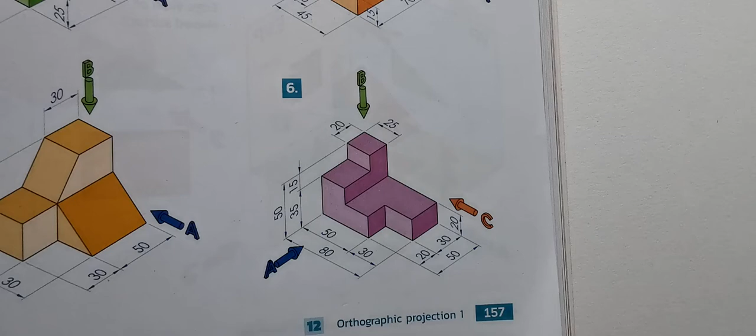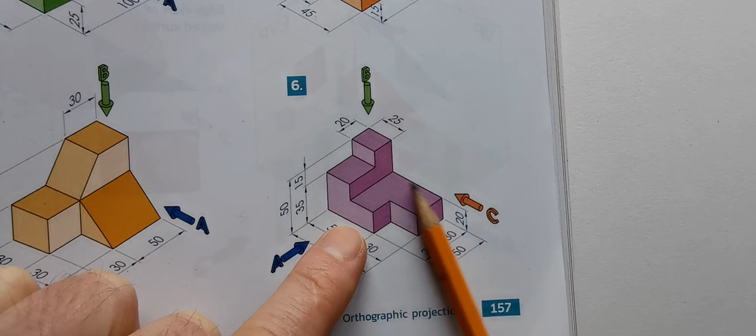Okay, everybody, next exercise here is exercise 6 or question 6. Now again there, in terms of crating, what is the easiest way to do this? I'm going to go with all the block on the ground first, and I'm going to ignore this L-shaped thing sticking up there. I'm going to do a second crate for that afterwards.

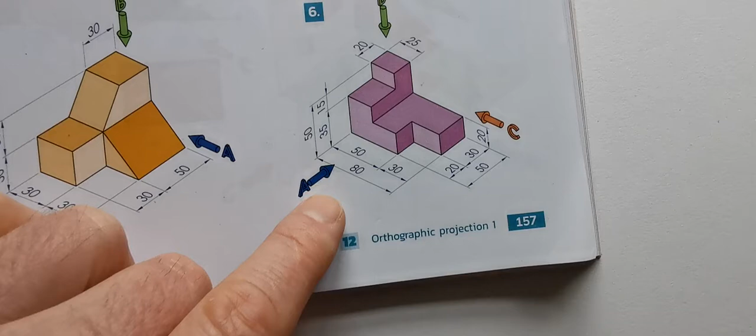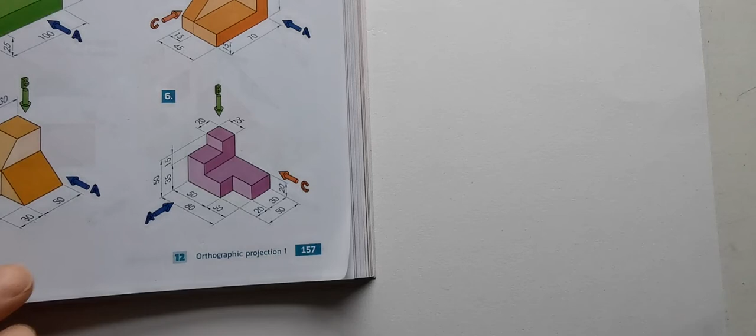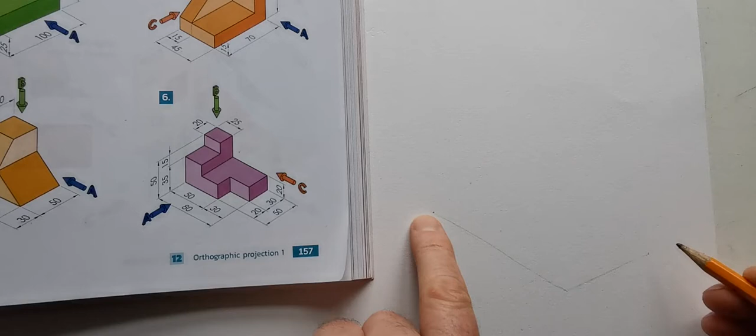So look, roughly the size of this is 80 by 50 roughly. So just zoom back a little bit away from this. Alright, so hopefully we can see that. So it's roughly 80. So by 50. So basically longer on the left, and it goes up about 20.

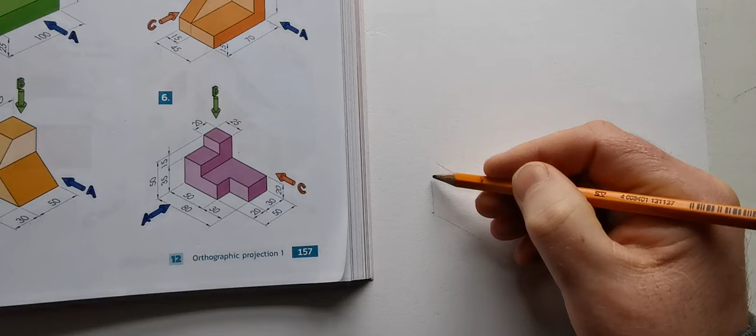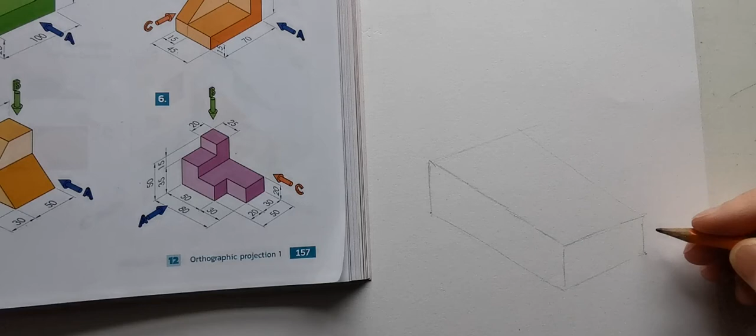So let's try and sketch in this slab kind of on the ground. So again there, you're just trying to get the angle there by scribbling over that lightly, just drawing the air above it. And that's not too bad there now. So that's the bottom slab there. Now in 20 then, which would be just a bit less than half, I'm going to just heavy that in.

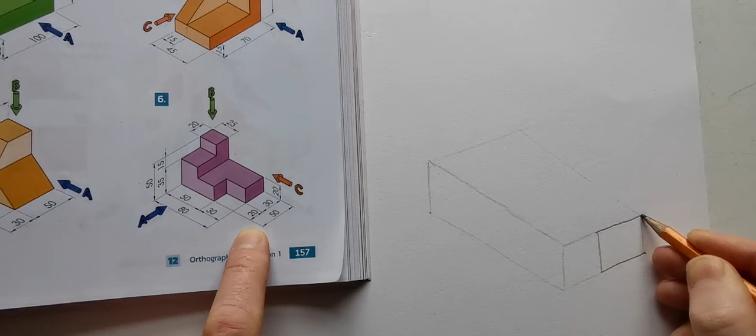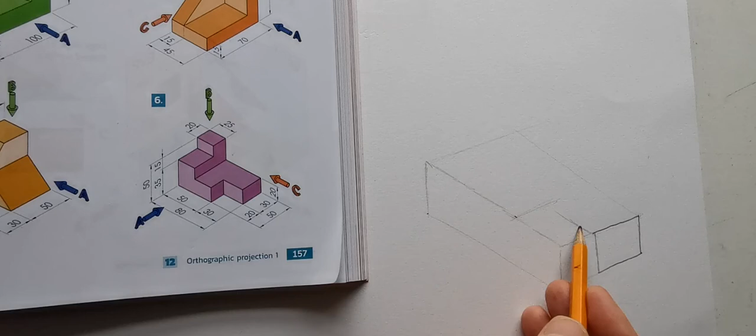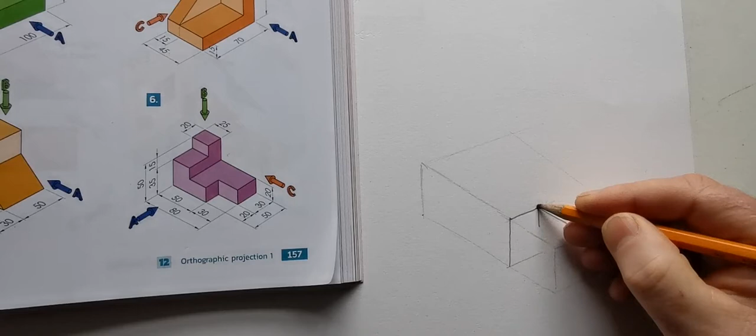And there's a cut going back here 30, which might be about that far. So I'm just going to take that across and bring this back. And that's going to be that notch or cut taken out of that there. Bring that down. And that goes back at this angle. And finally I'm just going to return this then back to here.

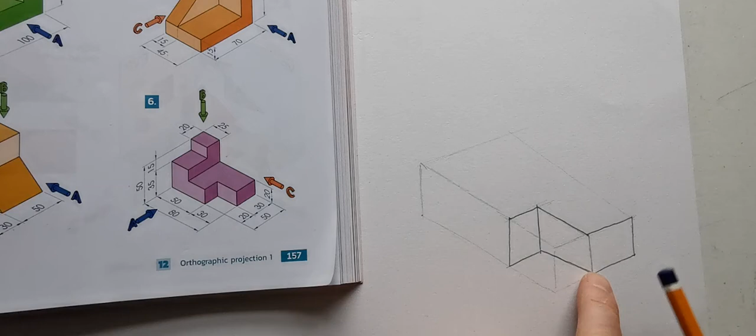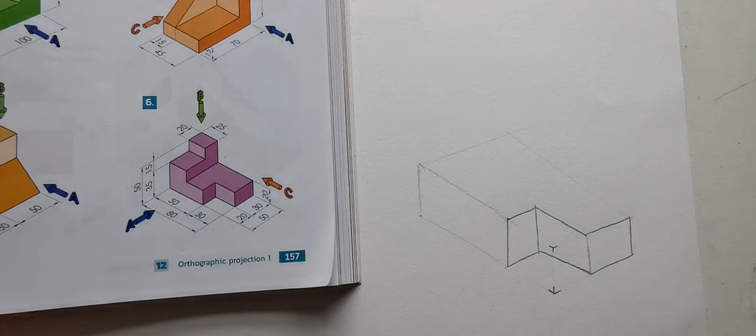And I could remove the crate from here if I wanted, or I could leave it. I think I'll just lighten it off, but I will again just leave the evidence of having had it there. Now back here then in 20, so if that's up 20, about the same distance in, I'm going to take this across and I'm going to bring this up now.

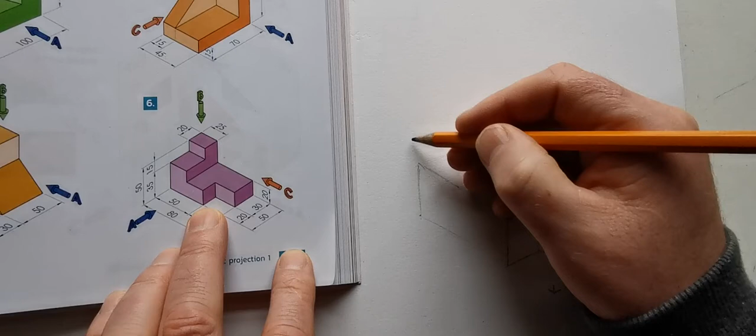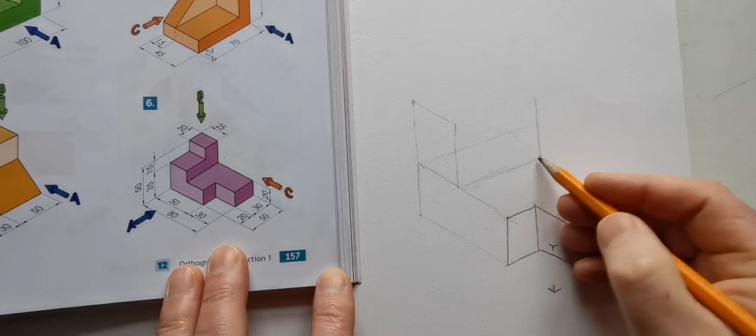So the full height of this is 35 and 15, which is 50. So if that's 20, it needs to come up 20 more, which would be that much, and then another bit, which would be 50. So I'm going to just put that height on here first of all, and then I'm going to bring this up about the same, take that back, across the back, and put on this slope here. So that's my crate for the taller bit back here.

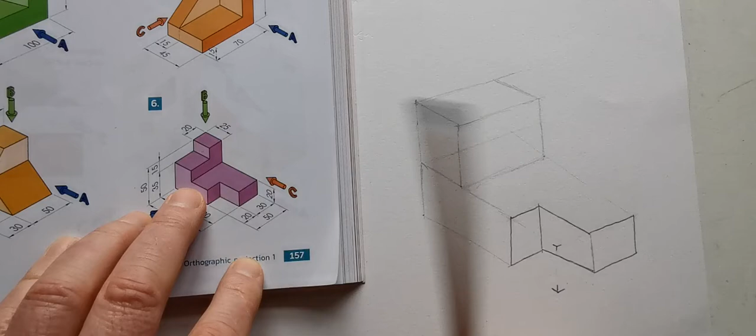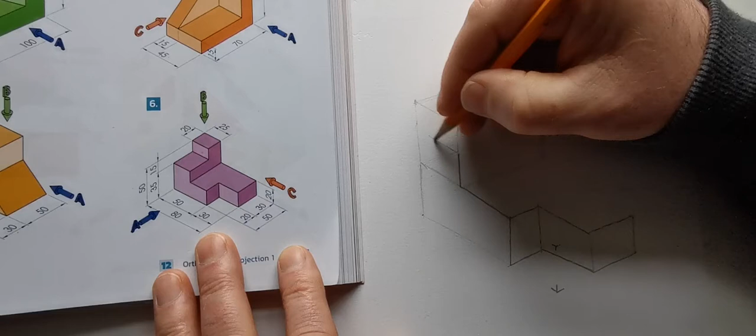So now this comes up. So the whole thing is 50. So basically it's halfway up. So if this is up 20, so it's 15 and 15. So that works out okay. So it's about halfway up here. This comes up. So now that's heavy back to there. That goes back here. I'm going to heavy this in. And that's the side of this sorted.

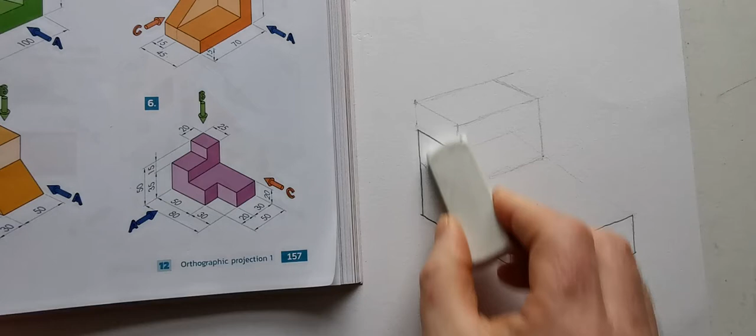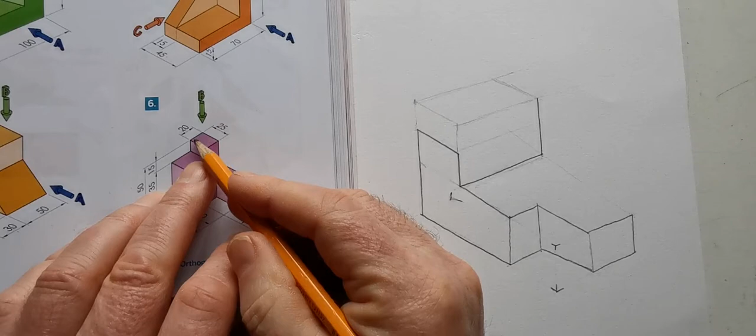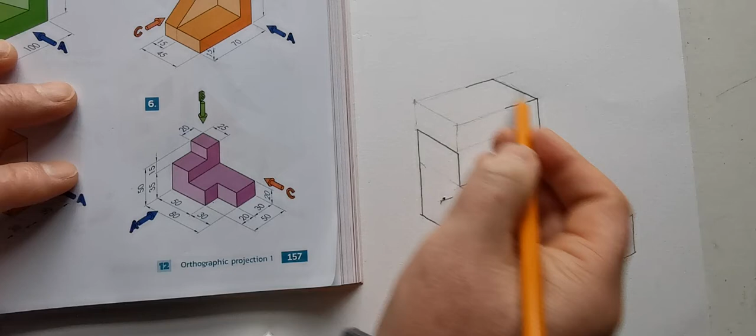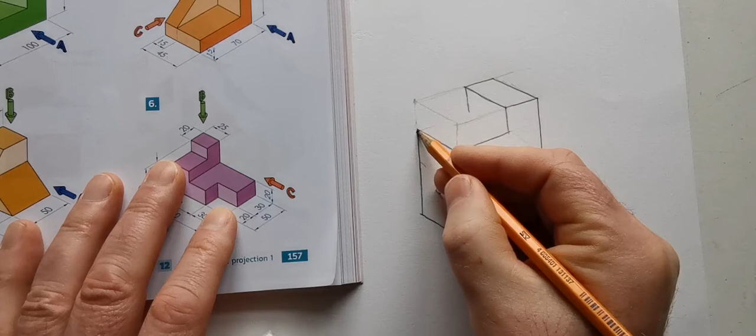Now, and that's heavy all the ways across here, heavy up to there. And I'm going to do this highest little platform up here, which is heavy back here. Now the whole thing is 50 and that comes in 20. So I'm going to just get my angle. And that drops down vertical. So I can just go back parallel and join that.

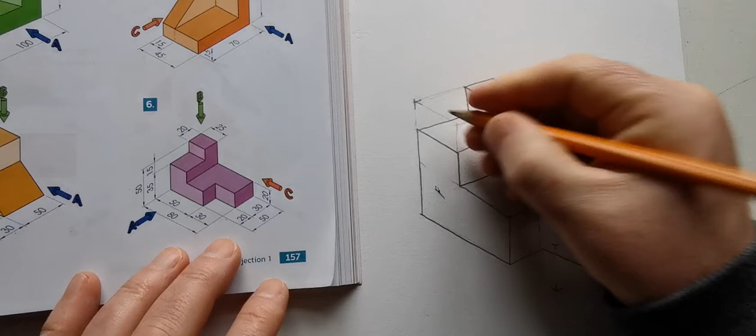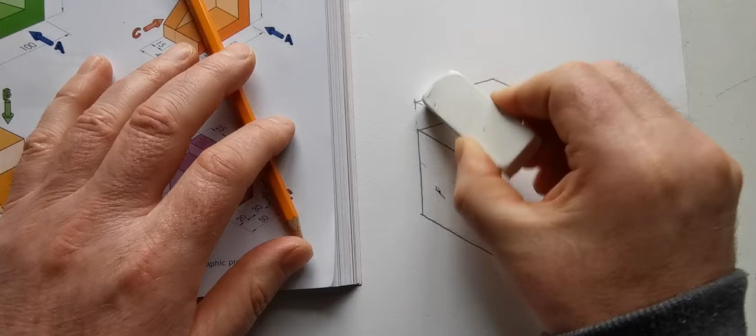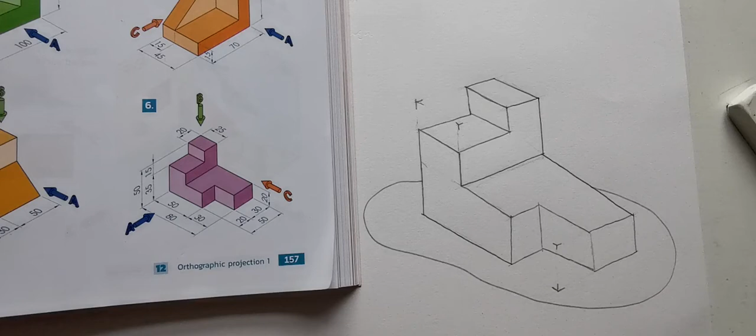And I will just finally heavy this in here. I'm going to leave the evidence here again of my crease on that corner and maybe here as well. And I'm going to just lighten off again then the rest of these here. And that there is not too bad, that'll do. I'm going to put a surface underneath that, and I'll just pause that then and put on some colours.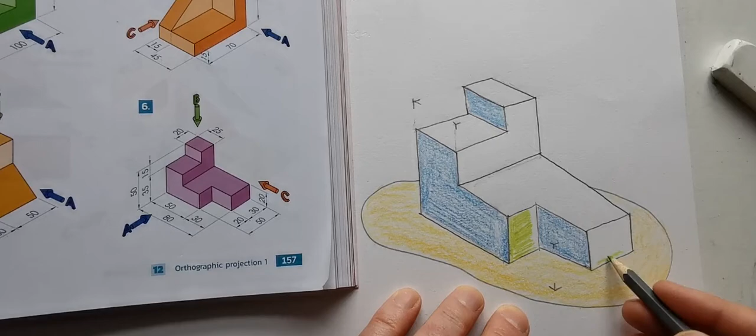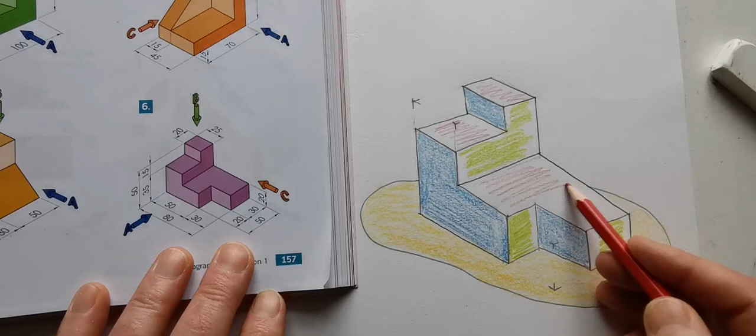Now what I'm going to do with colouring this one is a small bit different. I'm going to colour it so that the views are all the same colour. So what do I mean by that? Because there's no sloping surfaces on this. So all of the front view now is going to be blue. All of the side view is going to be green, and I'm going to put maybe red on top, for when we're drawing our views over here in a minute. So I'll just pause and finish colouring this.

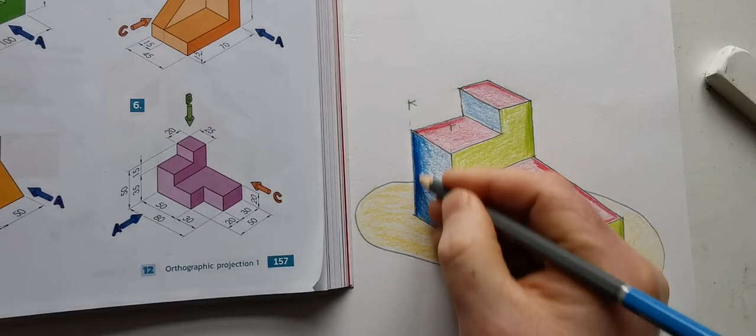Okay, so that's our colouring done. So what I try to do here now is just go a little bit heavier on the outside edges here, just where it's along an outside edge, back along there, along here, just run over them afterwards and just heavy them in and just feed it in along there.

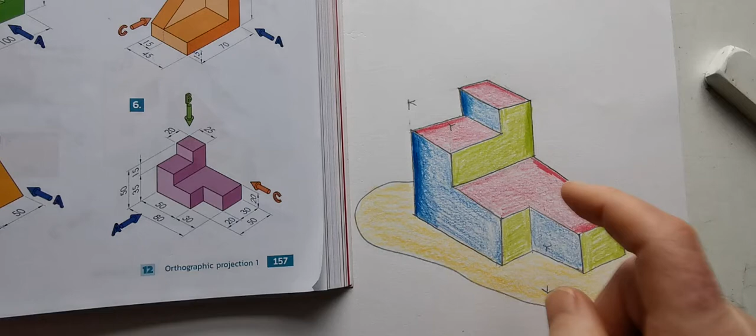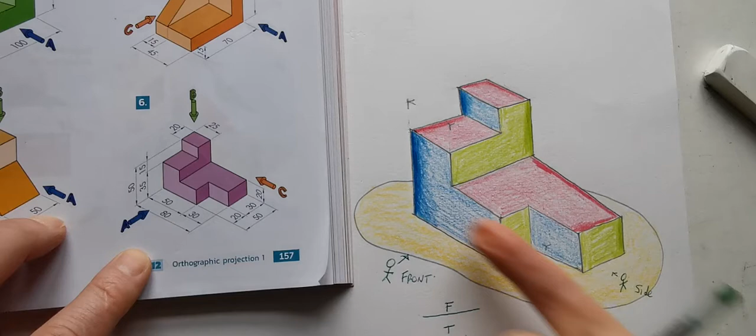Now, important, where is the person standing for the views? So the front view is looking from here. So we know the top's going to be underneath that, and the side view is looking from here. So it's going to be drawn on the left, always front view, top view underneath, but the side view is looking to the left, so it gets drawn on the left. So that's important. Next thing, how tall is it? 50 is the highest part. So we're ready to go.

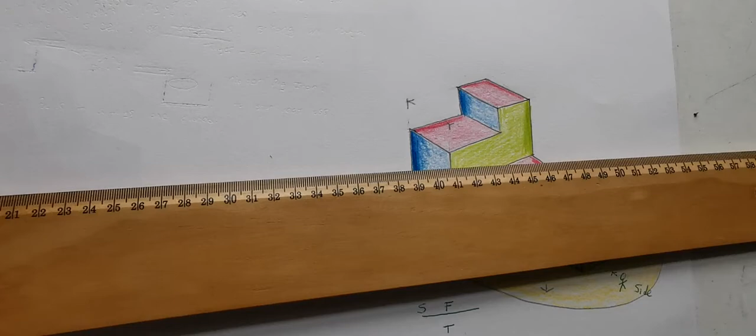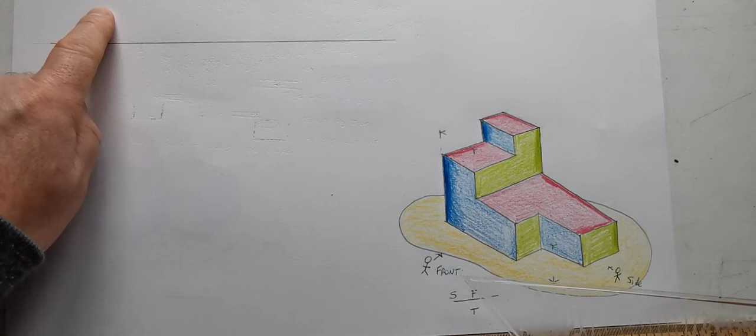So I'm going to just zoom back there a little bit. Okay, so we can see all of the object there now. So here's my XY line, which represents the ground. I was writing on through this earlier on, so try and ignore that. Okay, so my front view, side view is going to be over here. So my side view needs to be at the left. So I want to start the front view.

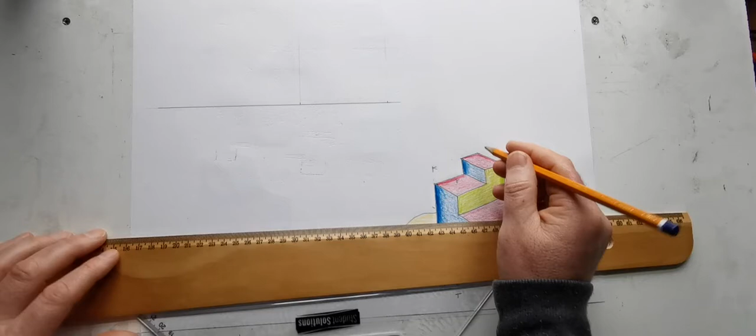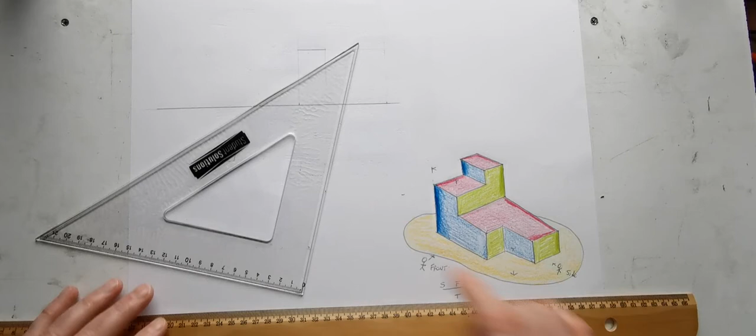Now, how wide is the front view? It is 80 wide. From the right to the left is 80. So there's 80. Now, how tall is it? We said 50 is the highest part. So I'm going to just keep this light for the time being because it doesn't all go up 50. So the highest part is on the left as I look in, and that comes in 25. So it's only 25, and then it comes down. And this step up here is 20.

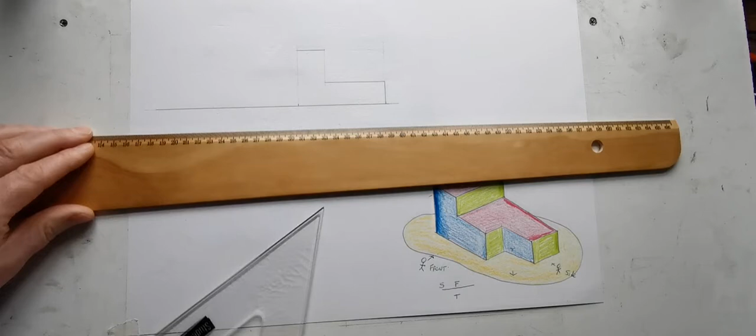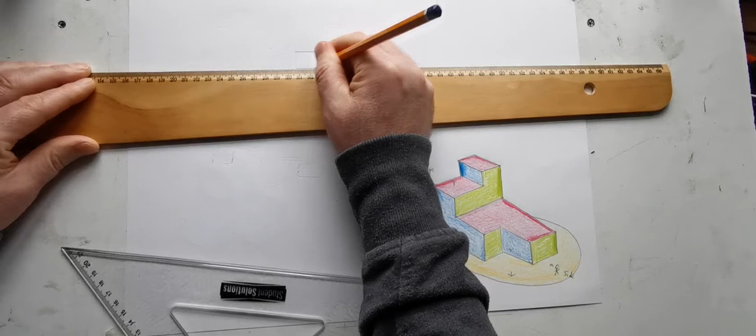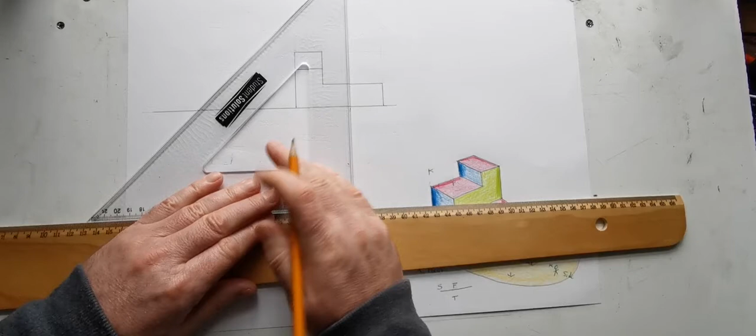So that step up is 20, and that comes across all the way to here. And the drop down here then is 15. And finally, this cut taken out of here is 30. So there's all of my front view now.

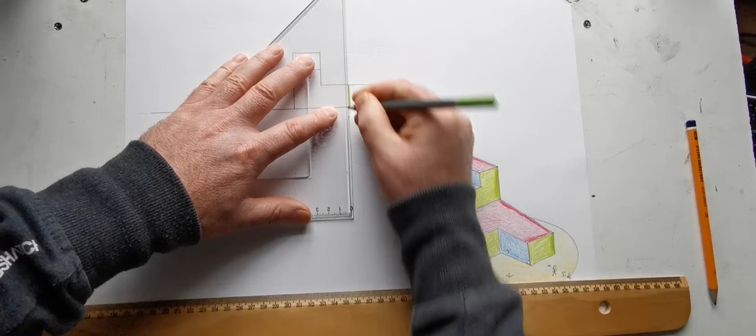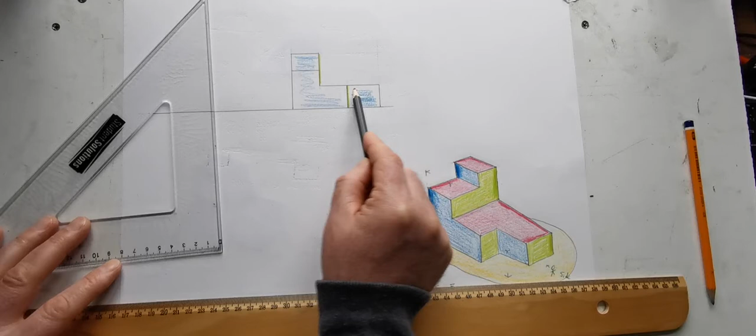Because of what I did there, the only thing I'm going to do before I color this in is I'm going to put that green edge on here. So those are those green edges there, and all of this then, everything is blue. Later on I'll pause it and colour it, but that's all going to be blue. That is my front view finished.

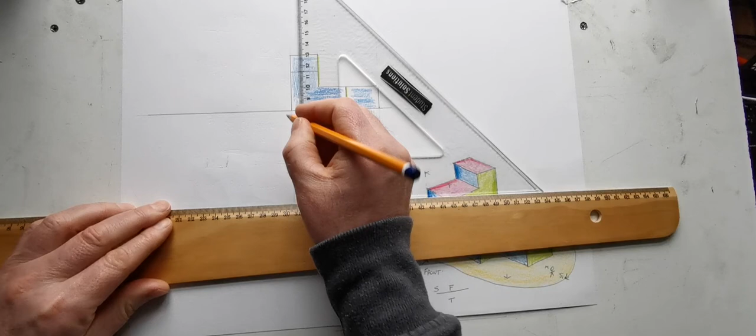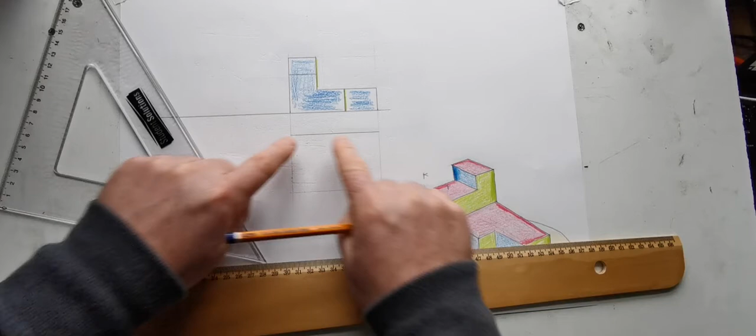So I'm going to be bringing down the left, bringing down the right, leaving maybe 15 or 20 between them. So my top view is going here from the very back to the very front, which is 50. But again, now we need to be careful because it's not a full rectangle. So I'll just put that rectangle in light because there's a corner chopped out of it here.

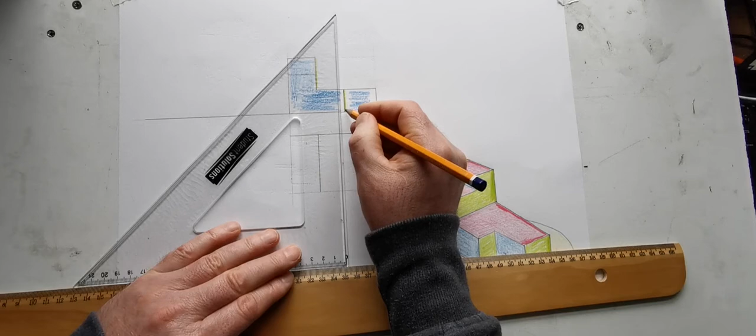So now I know that these steps here go the whole way from back to front. So all the way from the back to the front, that step goes there. And I'm going to bring down here now. This is where my cutout goes, and that step goes back 20.

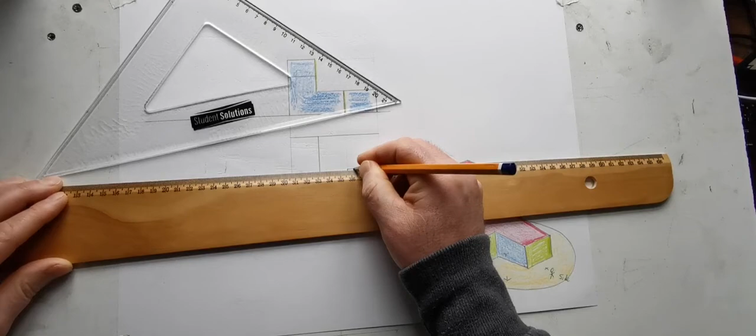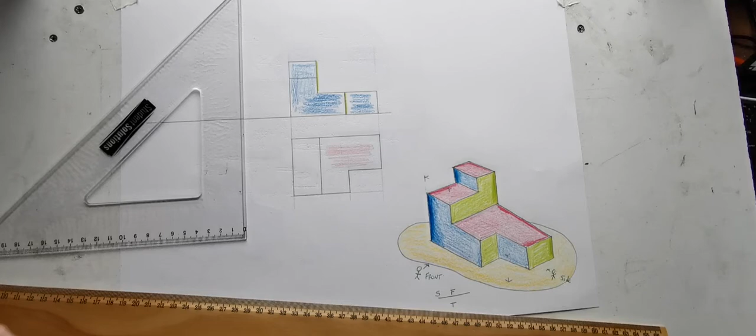So when I go heavy then, because we now have a lot of it done, that's the cutout, that's all going to be red. This is the green edge here, that's green, and these steps here now, so this is the front, so that little step there at the back, what is that distance? 20.

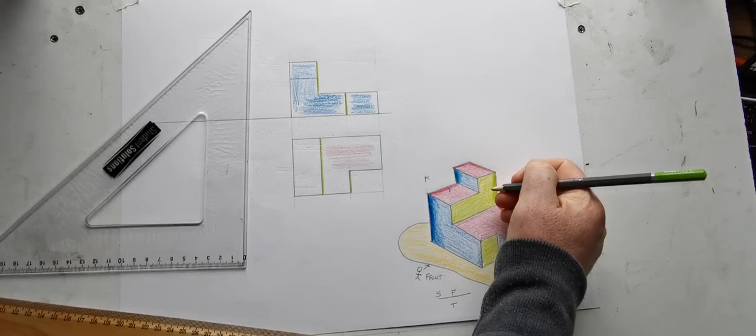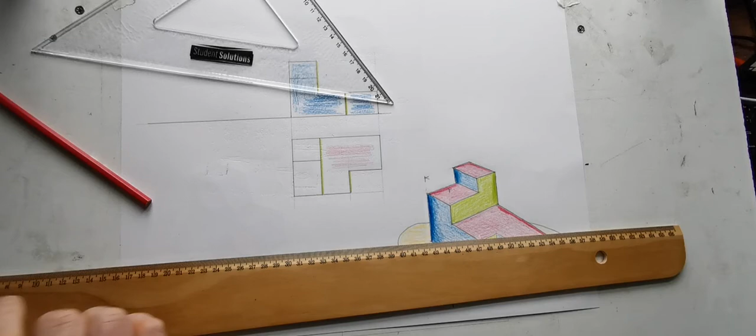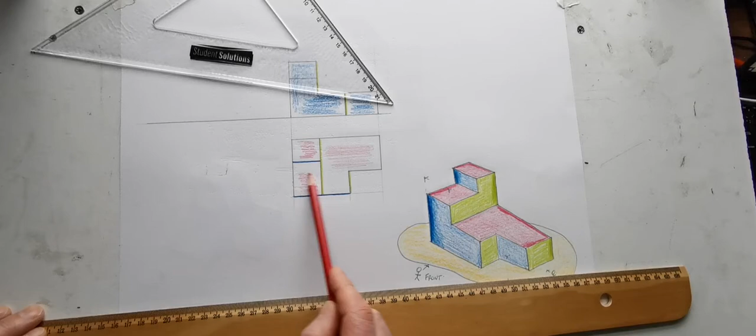So now I should put on the blue edge of that there. That's blue along here. And then, as I said, all of the top view looking down on it is going to be red. So that's the highest step here. This is the lower step down here. And this is the bottom step down there. So that's all of the top view drawn. So I'm going to move on to the side view now.

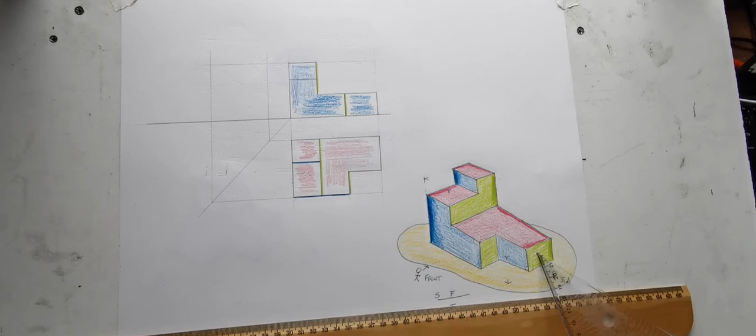Now remember I said that the side view, I'll heavy this in a little bit just to make sure it's coming out clear. So we're bringing these over. Here's front, here's the back. So it's all going to be drawn between those two lines. Take them up light. I'm going to bring across the top height first. Okay, now looking in from the side here, what are we going to see? We're going to see those two green four-sided boxes there. I'll call them boxes.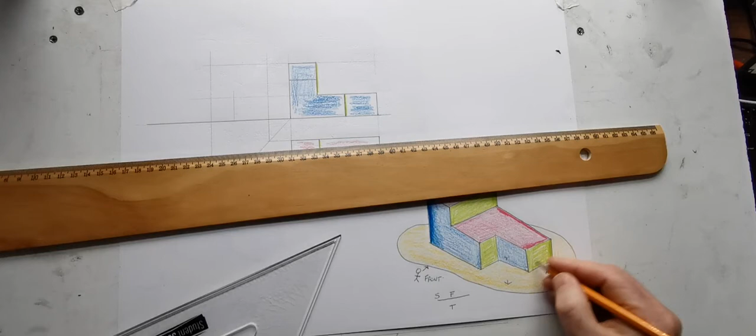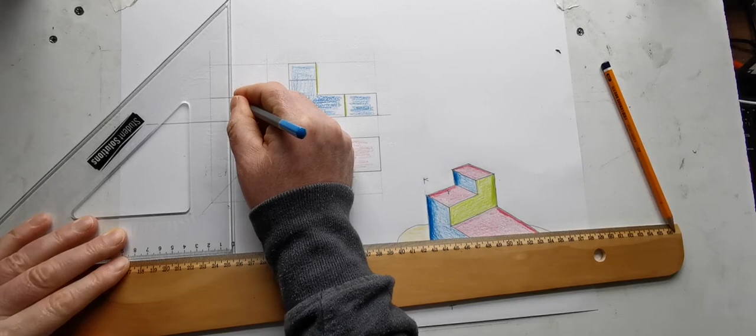So I'm going to bring them over. Now I could measure, but we've already measured, so I'm going to just bring them over so I don't have to measure again. And take the height across. Now I know that this is 30 and that's 20. So I could measure 30, 20, but the whole idea is to not have to measure everything, by just projecting. So now that edge there is going to be blue. And those two are here and there. So that's the start of it.

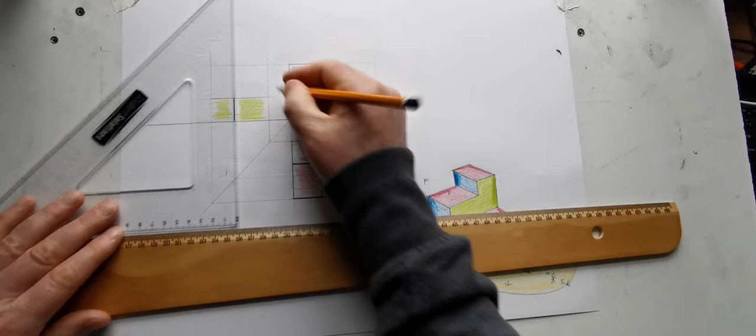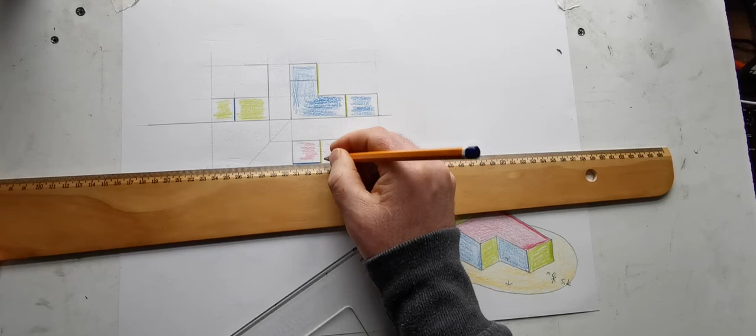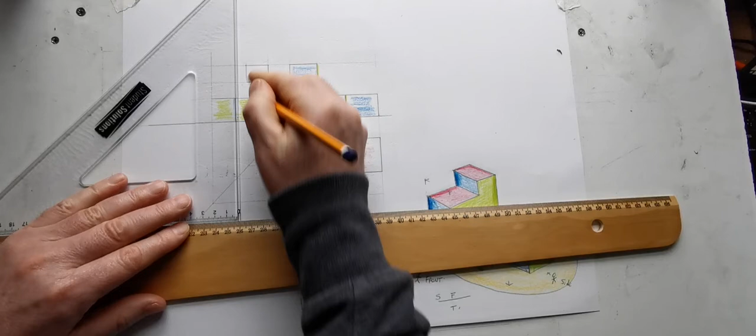Now the next thing here, it goes up on my right, goes up to the top. And then it comes in 20. So I could measure in the 20 if I wanted to, but because I've already done the 20 here, I can just bring it over and up and it works out the same. So that step is coming down here, it comes down this far. So now that's our step, and that goes all the way out to the end then.

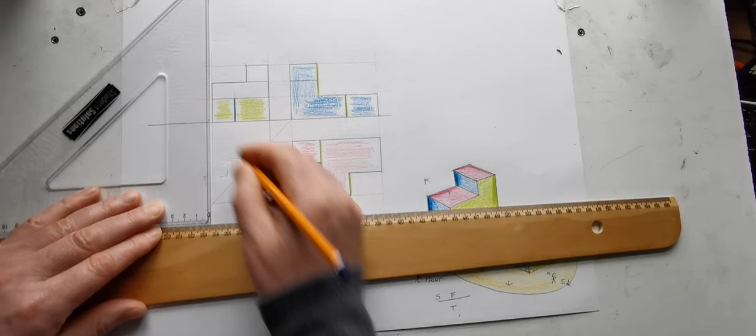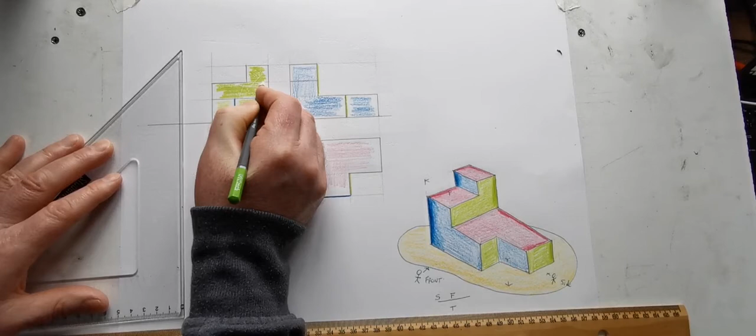So all of this is green. Just lighten that projection line off there, it's a little bit too heavy. So all of this is green, that's sort of an L. And that step up there is blue. And the top of this is red. Top of this step is red. And also the top of this is red.

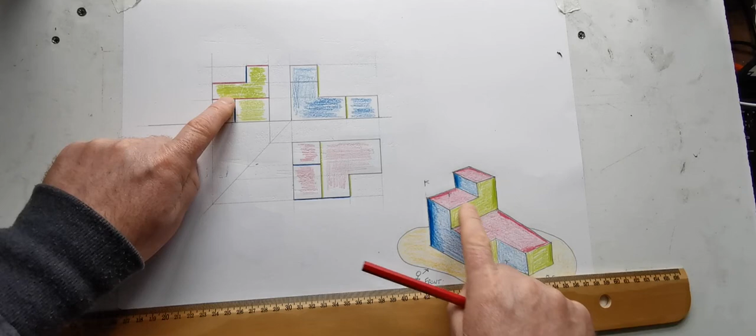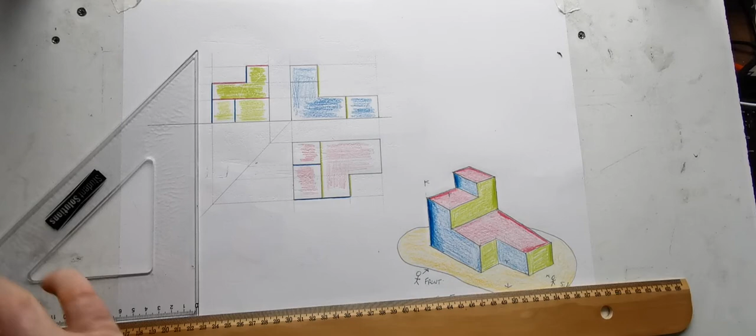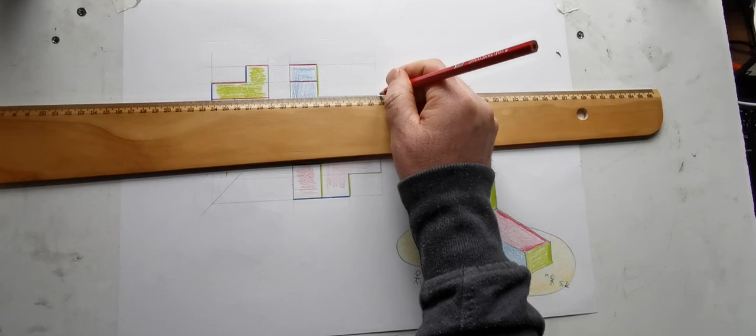So that is the bottom step. That is the second step. This is the top step. This is blue for there, blue for there, blue for here. And I think I'm almost ready to pause and just do the main colouring. The very top step over here is red. And this is red, and looking in the front view, that is red over to here. So I'm going to just pause that now and colour.

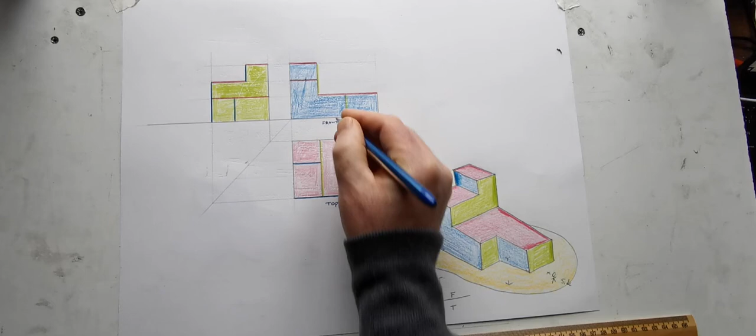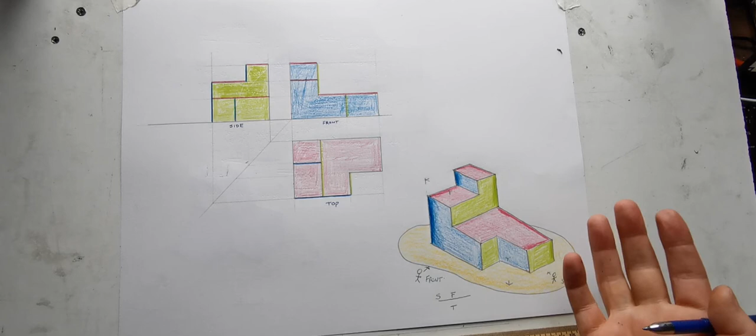Okay, so I'm going to emphasize again how important this is. Here's our front view, also called a front elevation, because elevation is all to do with heights. This is our top view, also called a plan, and this is our side view. And they must go front view, top view straight underneath, side view beside the front view. That is the way they're laid out. So just make sure you don't just plonk them anywhere on the sheet. That's where they need to go. So best of luck.